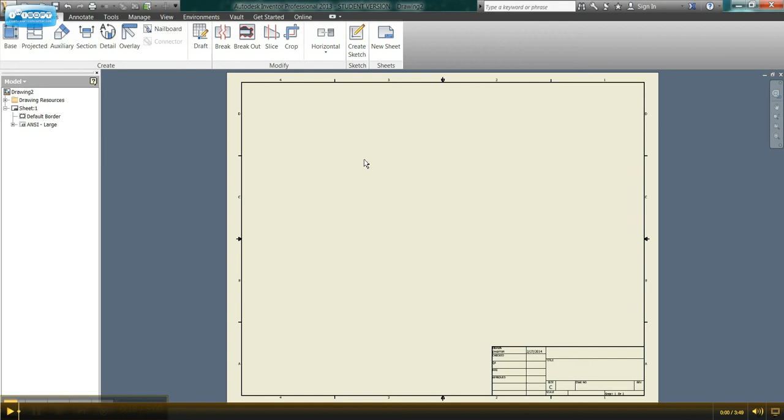What we're going to go ahead and do is first place our shape. So we're going to come up to where it says Place Views and select Base. That's going to bring up this box here, which has some different options.

As you can see, we have orientation over here on the side. Our style, we always want to select hidden line style. View, you can keep the same, just at view 1. And for our scale, that can be changed, but for today we're just going to keep it at 1:1.

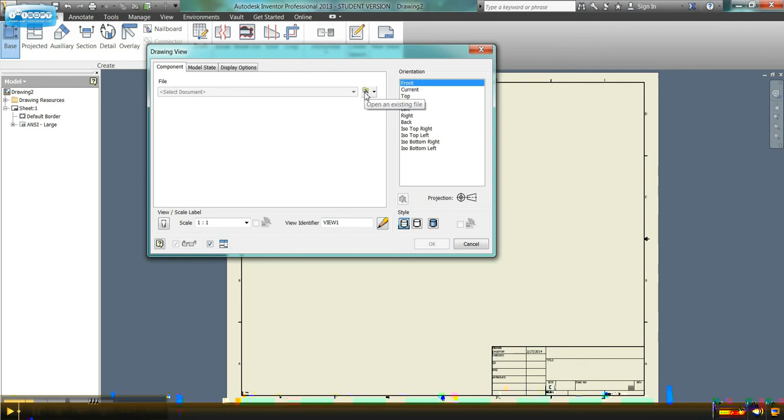So now we need to go ahead and pull out our object. You all will be making a drawing file of your keychain, but for today's example video, I'm just going to use our cube that we've made in the past. So you select the little magnifying glass there, and it's going to open up your saved items. I'm going to select cube, you're going to select your keychain, and we'll select open.

Just go ahead and hit yes on this box. It's just saying it may have a watermark, and what you see is you have your object right over here.

You can change the orientation of your object sometimes depending on how you drew your object in Inventor. Just because the orientation is listed as the front view doesn't necessarily mean that it's the front view. Remember, our front view gives us the best shape of our object. We can see all of the parts, and it has the least hidden lines. In this case, this is a pretty good front view, so I'm going to stick with the one that's been given to me.

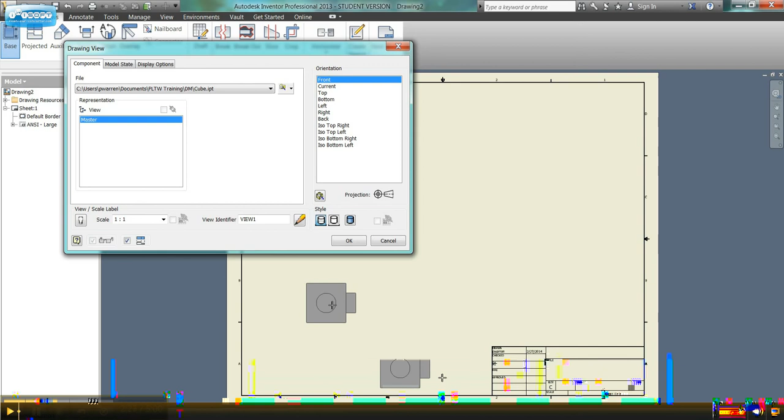And when I make sure everything else is all right, we've got 1:1, I'm on hidden line style, so we're good. I'm going to come down here and start and place the front view. I'm going to place it right here and just give it a click, and then my box will go away.

So now what you can do is we need to place the top view and the side view. I clicked once, and now I'm just going to move my mouse up, and it's going to give me the projection, or the projected top view. I'm going to put it about right there. I want to leave enough room to dimension around it, so I don't want to put it way up here at the top where I wouldn't be able to dimension any of the parts.

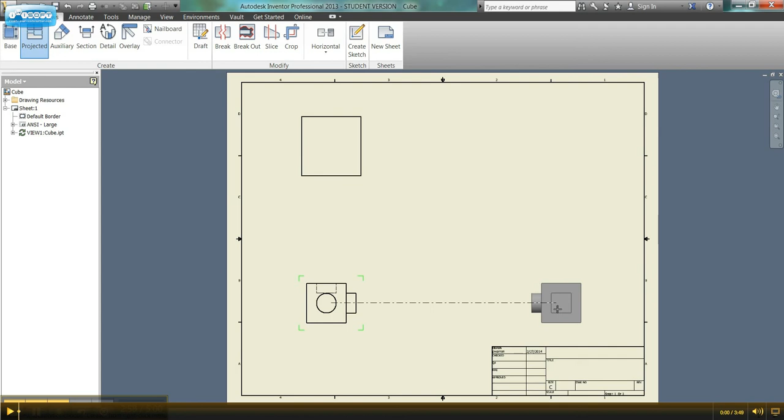So I'll go about right here, and then same thing, I'm going to come back down, go out to the side, and it's going to give me my side projection. And then lastly, I can extend my part up into the upper right-hand corner, which is going to give me my isometric, and I'm going to click.

So the boxes that you see right now, the 3 boxes on the screen, indicate where the top and side view and isometric view will be. I don't want to place any more views, so I'm going to right-click and click Create.

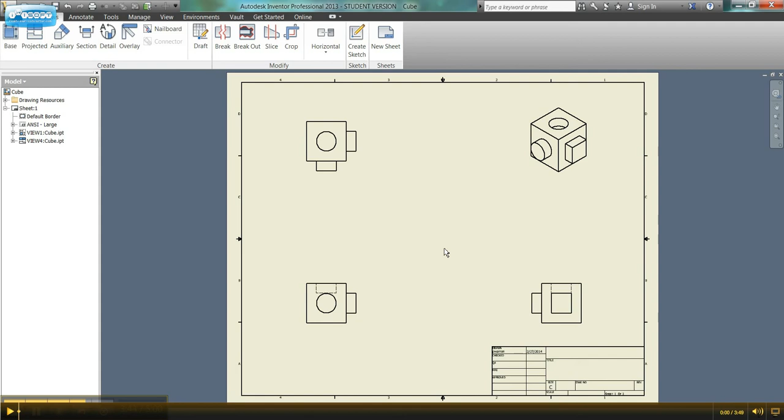Once I click Create, you can see that it's given me the blueprints, or the drawing view of my part. It is complete with hidden lines and all the parts of the cube. So in the next video, we'll go ahead and jump into how to dimension this, and you guys can start dimensioning your keychains. See you soon.